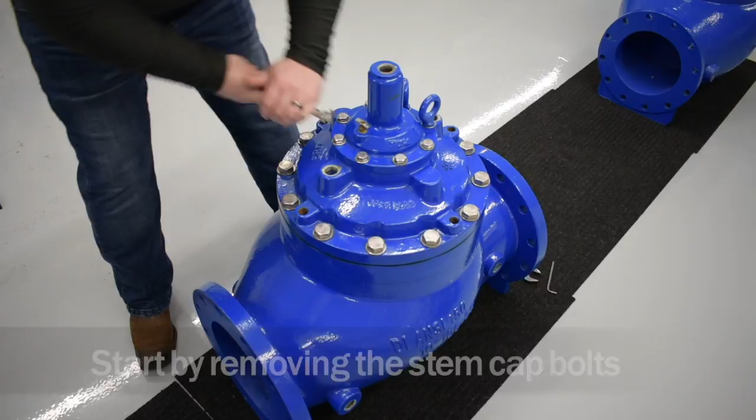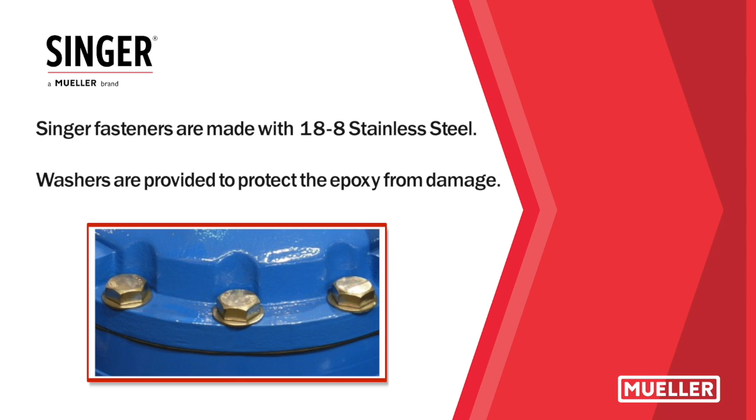Start by removing the stem cap bolts. Singer fasteners are made with 18/8 stainless steel. Washers are provided to protect the epoxy from damage. Press down on the stem cap before removing the final bolt. The spring could eject the stem cap without pressure.

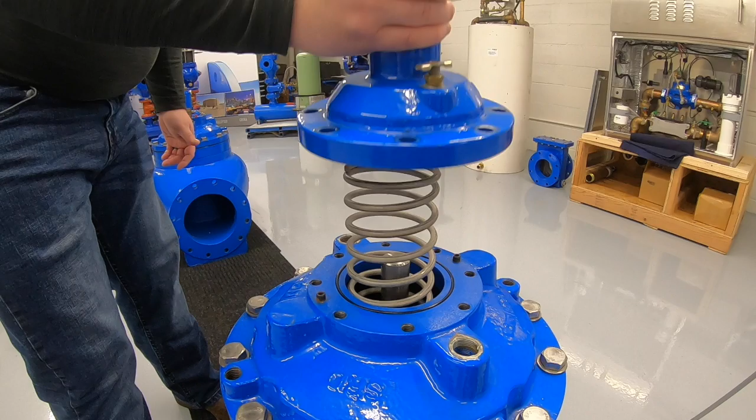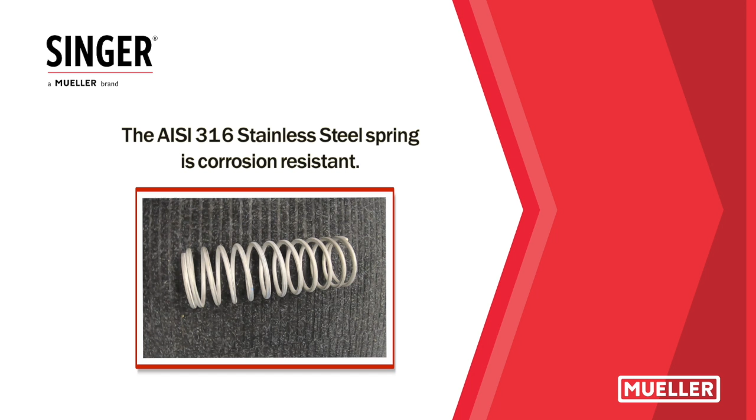A removable stem cap allows for access to the stem without the removal of the bonnet. This saves time and labor when adding stem accessories in the field. Remove the spring. The AISI 316 stainless steel spring is corrosion resistant. The stem cap features locating pins for easier placement.

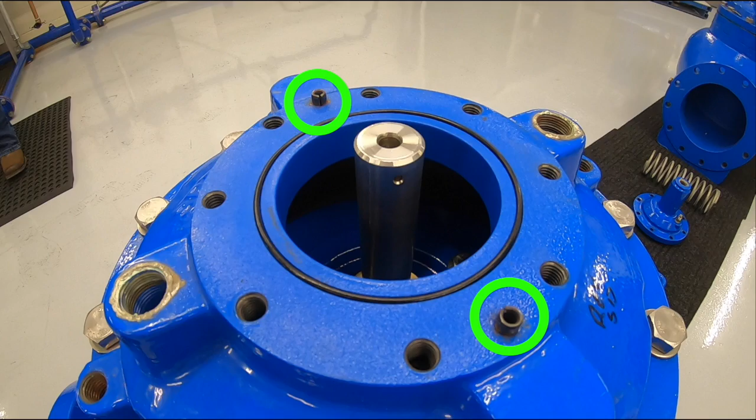Remove the bonnet. Once the bonnet bolts are removed, utilize the lifting eye bolts to lift the bonnet. Lifting eye bolts assist in disassembly on larger valves. A partner lift is recommended.

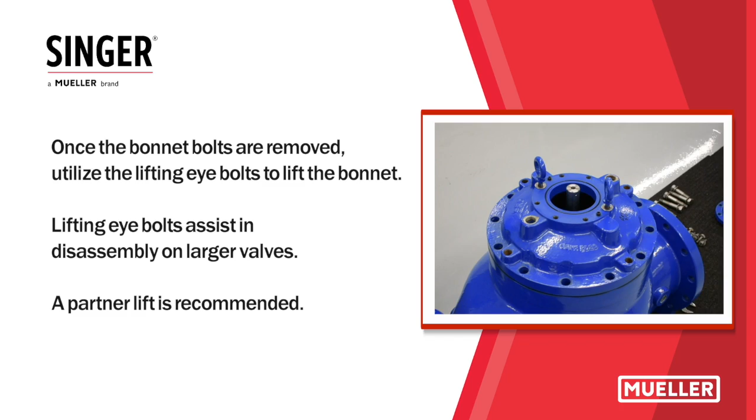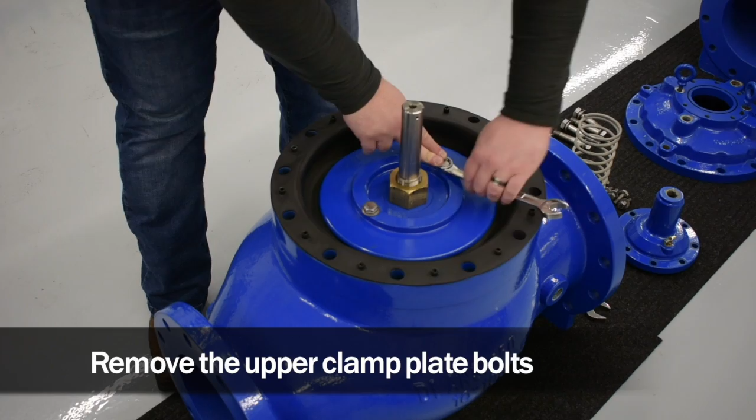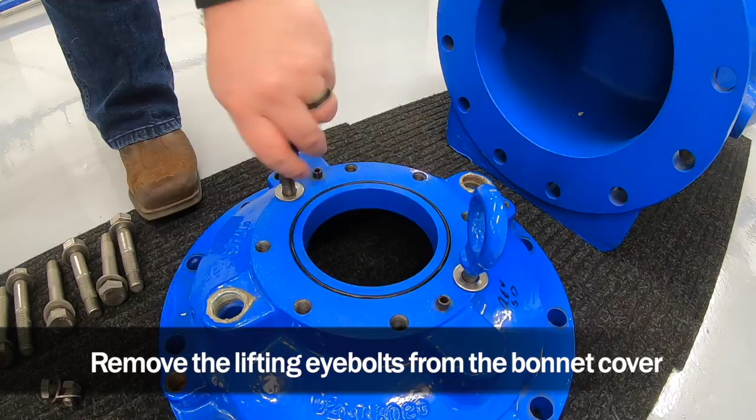Remove the upper clamp plate bolts. Remove the lifting eye bolts from the bonnet cover. Attach the lifting eye bolts to the upper clamp plate. Tighten by hand. Lift the diaphragm off of the locating pins.

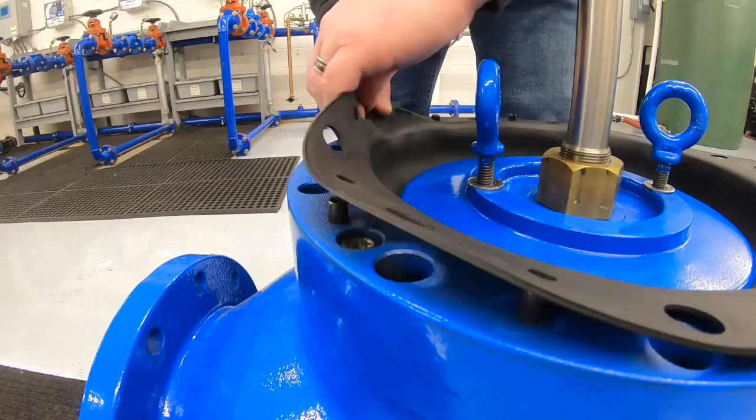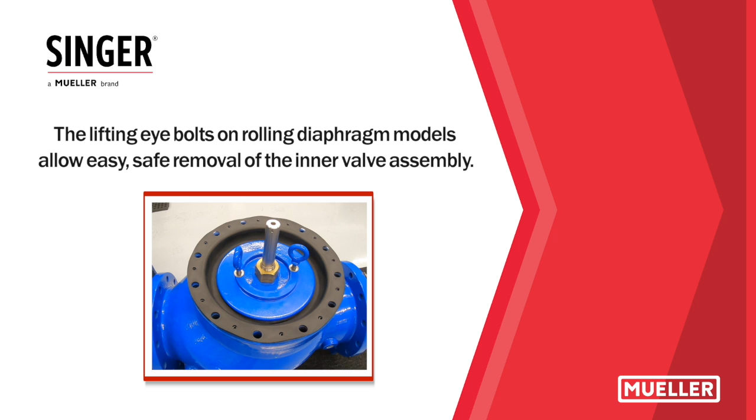The lifting eye bolts on rolling diaphragm models allow easy, safe removal of the inner valve assembly. Use a partner to lift the diaphragm assembly vertically as to not damage the stem.

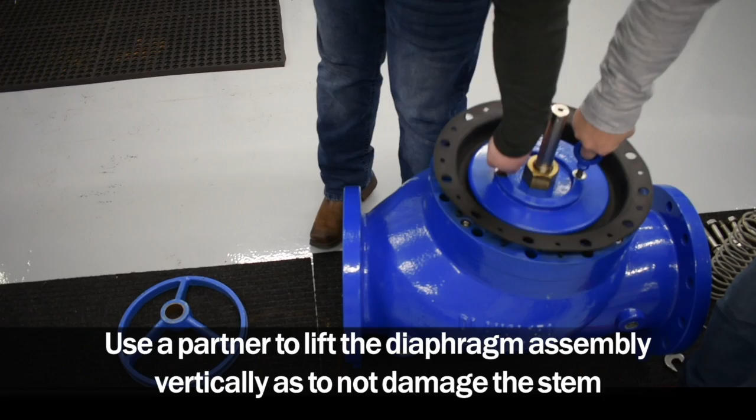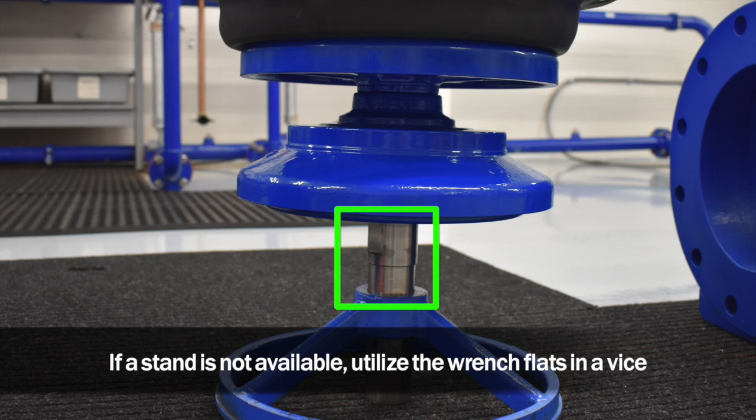If a stand is not available, utilize the wrench flats in a vise. Wrench flats are standard on 10-inch and below. This keeps the stem from being damaged while servicing. Available with oxynitride treatment to increase lubricity. 316 stainless steel construction.

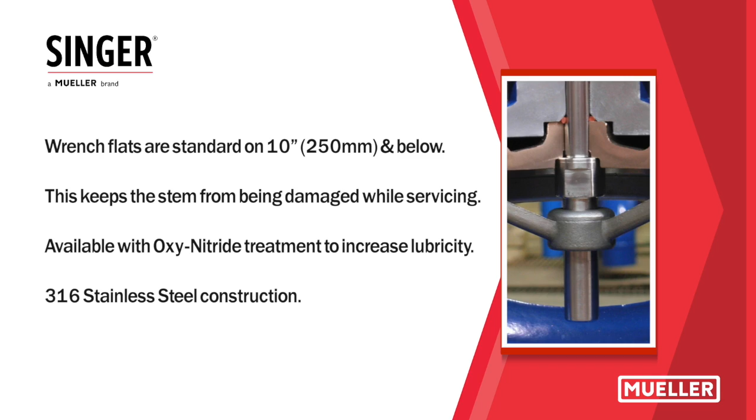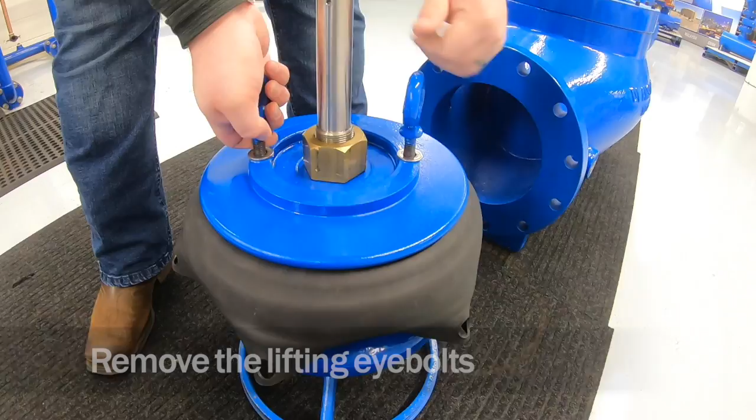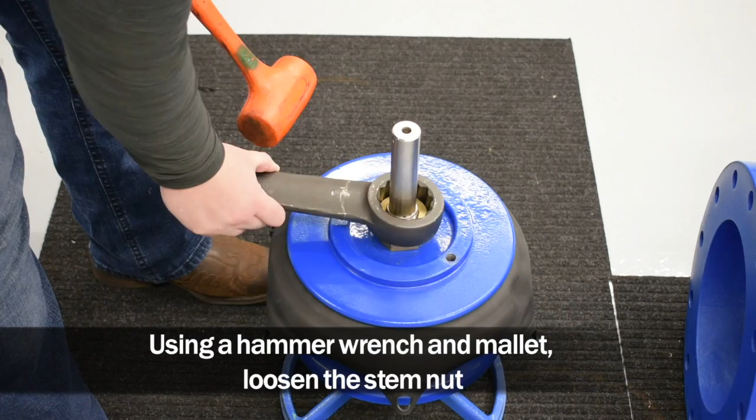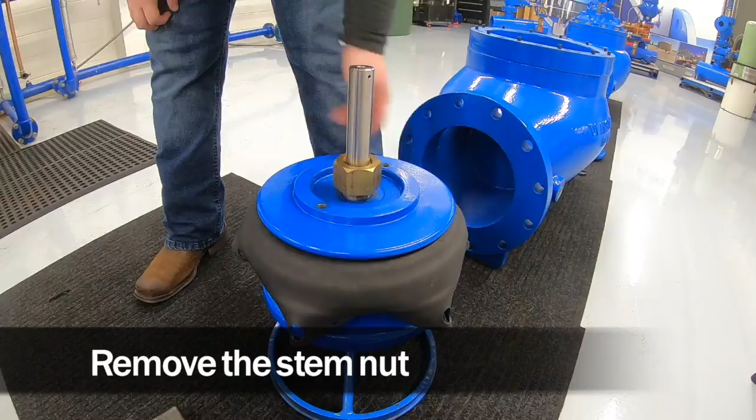Carefully fold back the diaphragm. Remove the lifting eye bolts. Using a hammer wrench and mallet, loosen the stem nut. Remove the stem nut. Lift the upper clamp plate off of the diaphragm assembly.

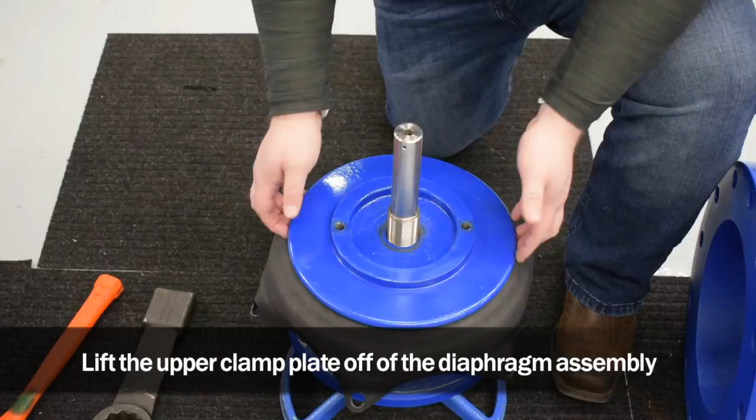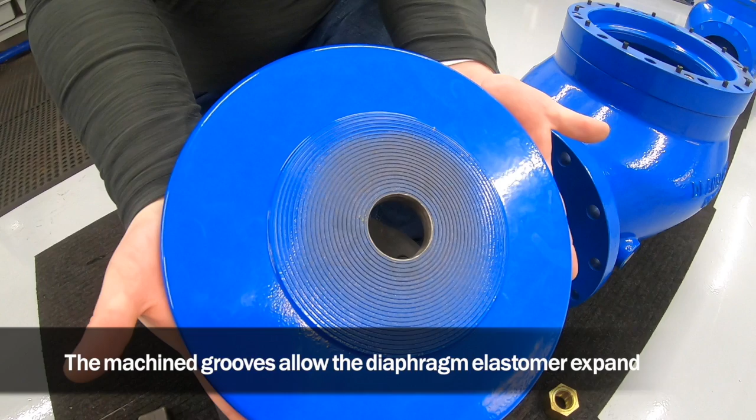The machined grooves allow the diaphragm elastomer to expand. Carefully return the diaphragm to the original position. Lift the diaphragm off of the stem. Singer rolling diaphragm design offers unequaled low-flow stability, increased efficiency for cost savings. EPDM elastomer construction is standard, chlorine and chloramine resistant.

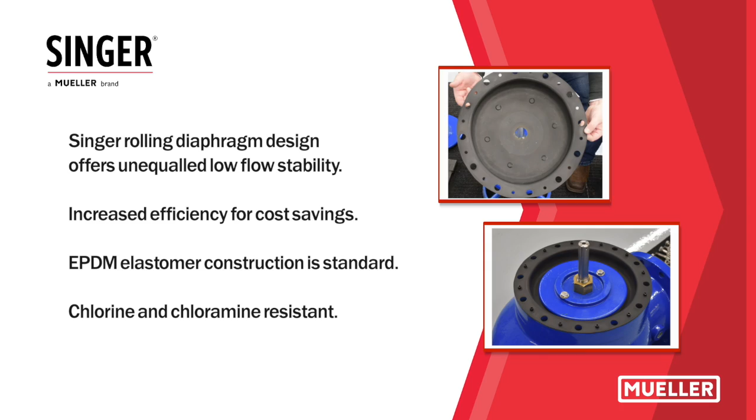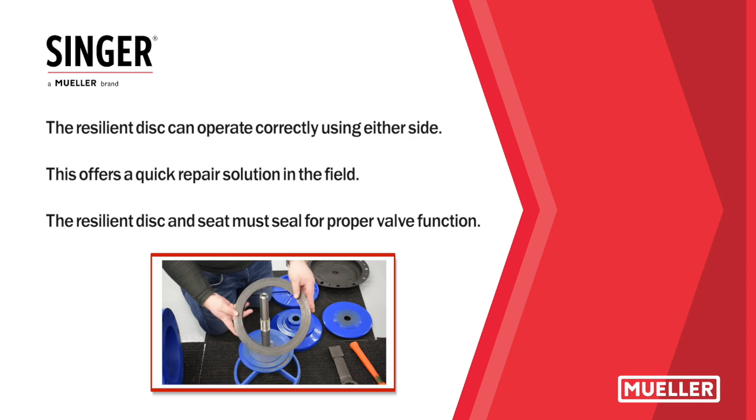Lift the lower clamp plate off of the stem. Lift the inner valve off of the stem. Lift the resilient disc off of the stem. The resilient disc can operate correctly using either side. This offers a quick repair solution in the field. The resilient disc and the seat must seal for proper valve function. Place the resilient disc onto the disc retainer with the sealing surface facing down.

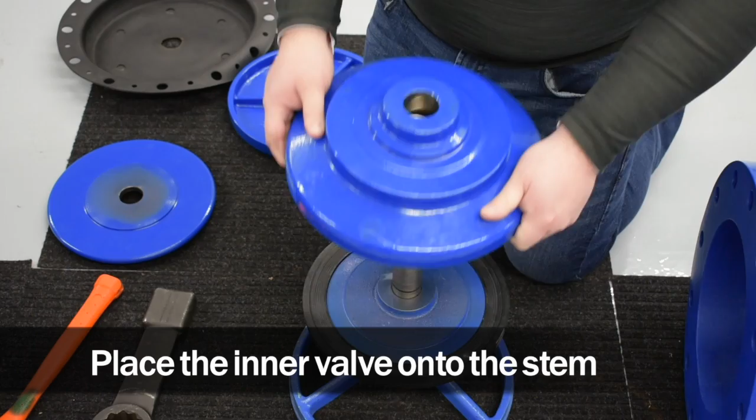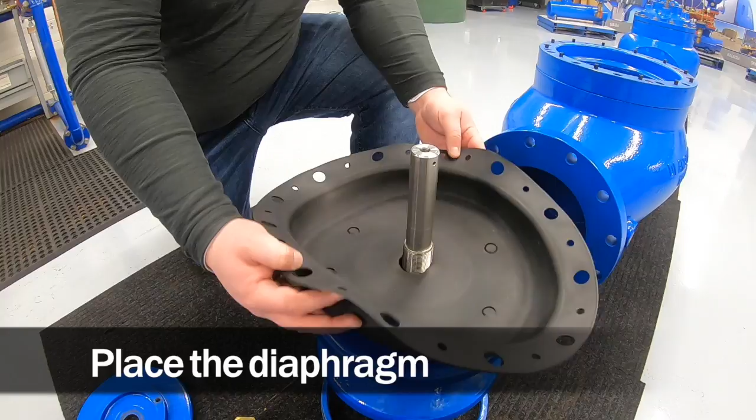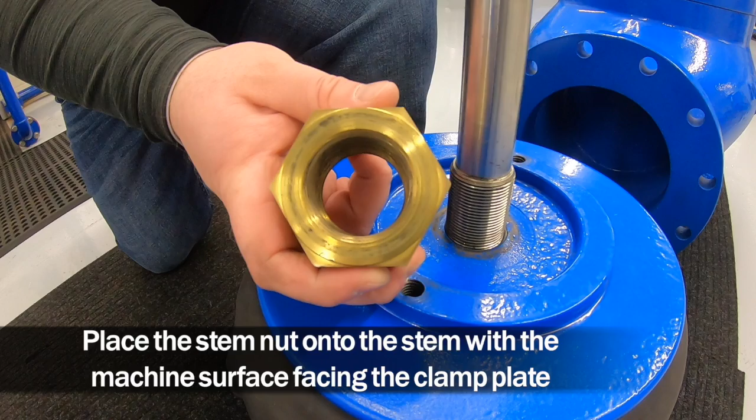Place the inner valve onto the stem. Place the lower clamp plate. Place the diaphragm. Carefully fold the diaphragm away from the stem. Place the upper clamp plate onto the diaphragm. Place the stem nut onto the stem with the machined surface facing the clamp plate. Hand tighten.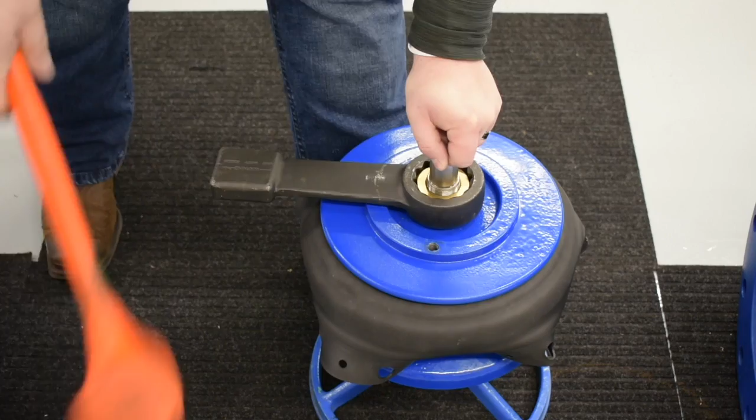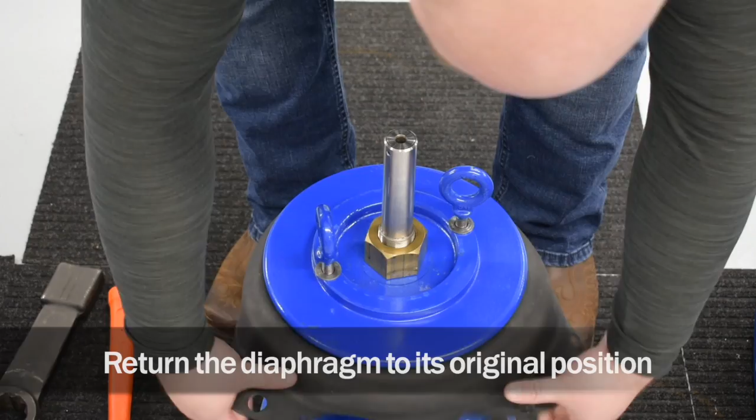Firmly tighten the stem nut with a hammer wrench and mallet. Attach the lifting eye bolts to the clamp plate. Return the diaphragm to its original position. Locating pins are utilized to easily install the diaphragm and bonnet. This keeps the diaphragm from binding or tearing during installation.

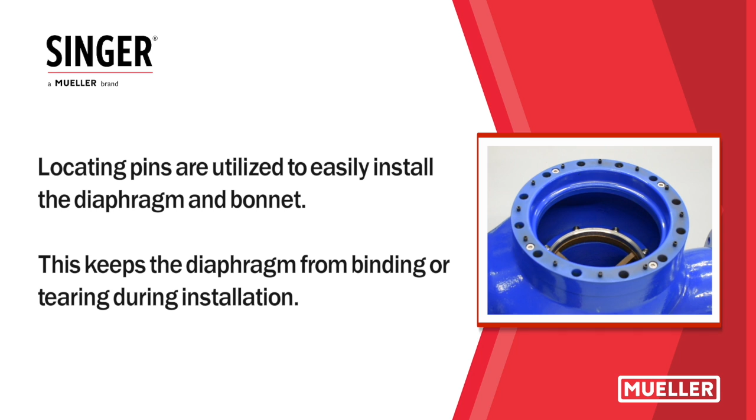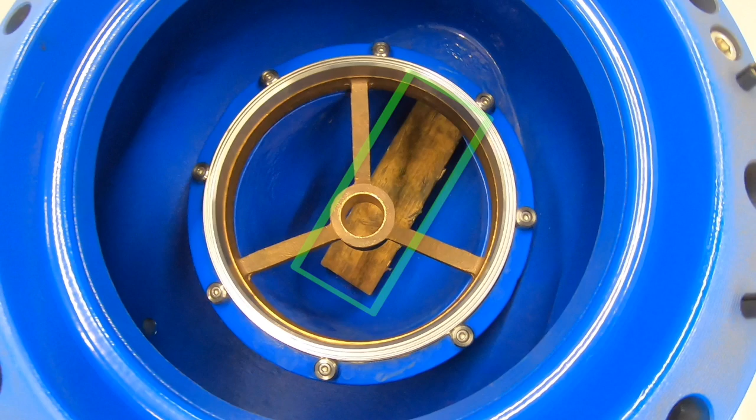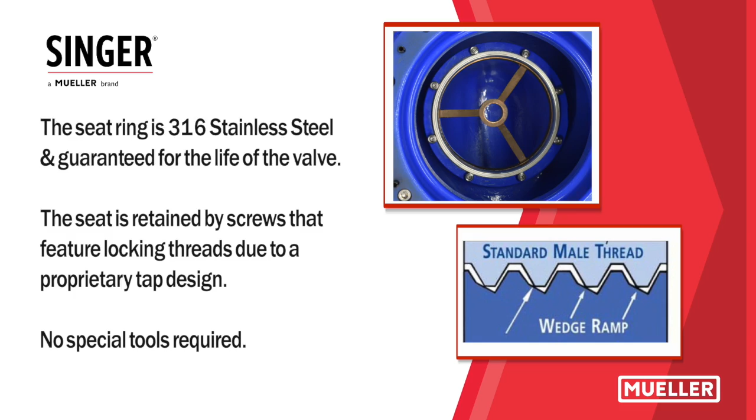Debris underneath the seat is easily removed. The seat ring is 316 stainless steel and guaranteed for the life of the valve. The seat is retained by screws that feature locking threads due to a proprietary tap design. No special tools required. Use an Allen key to loosen the seat screws.

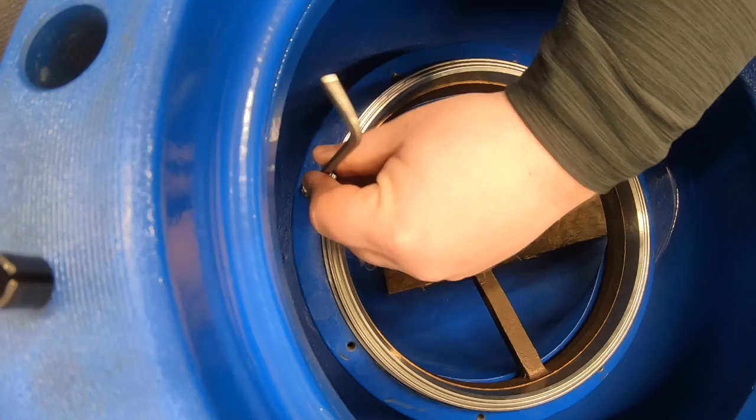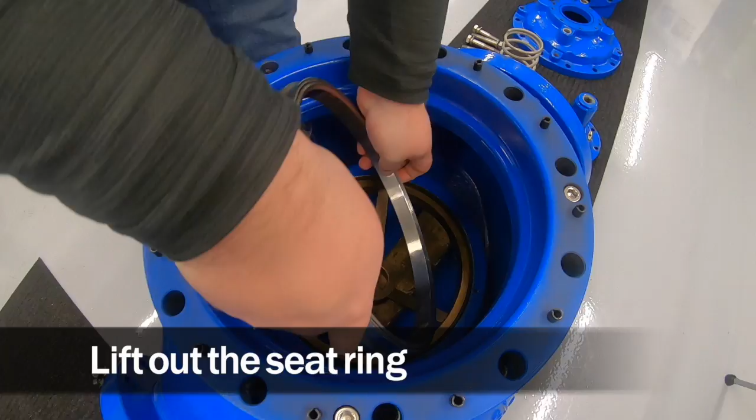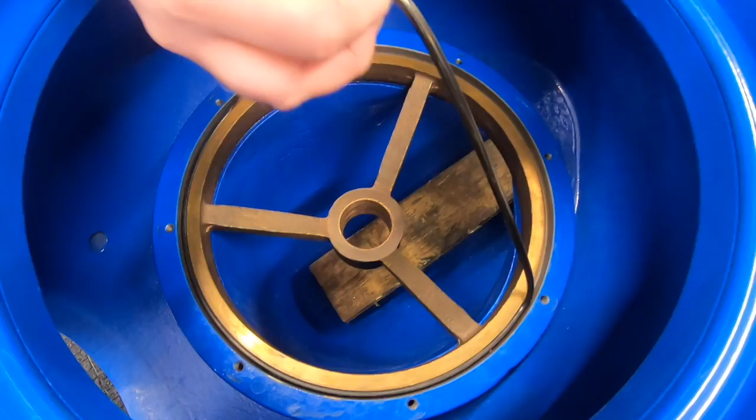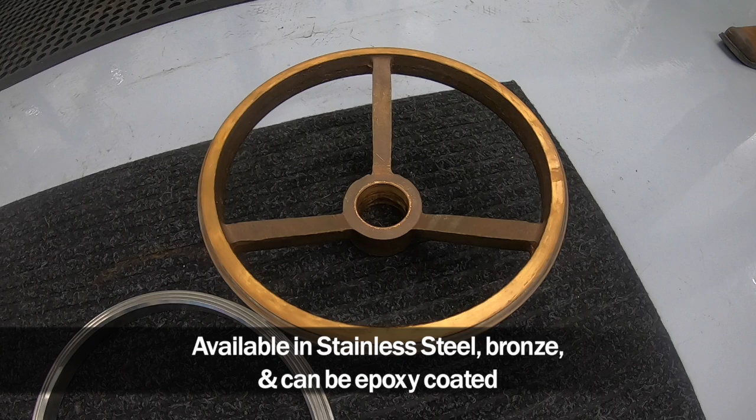The seat and stem guide are two separate pieces in this application. Lift out the seat ring. The seat ring features bevels that provide quiet valve operation. Carefully remove the seat seal. Remove the stem guide. The stem guide is available in stainless steel, bronze, and can be epoxy coated. Remove the debris.

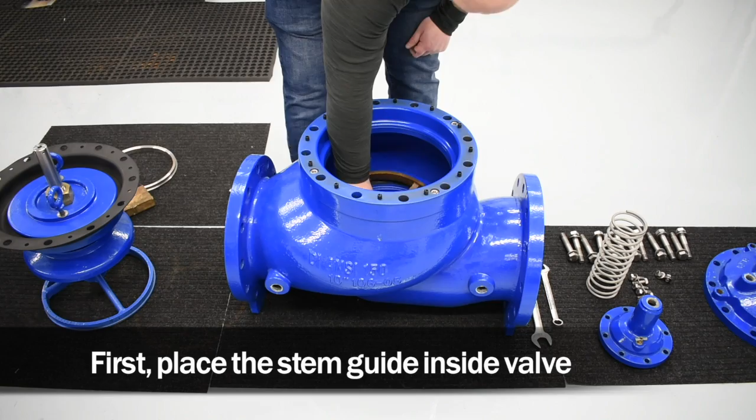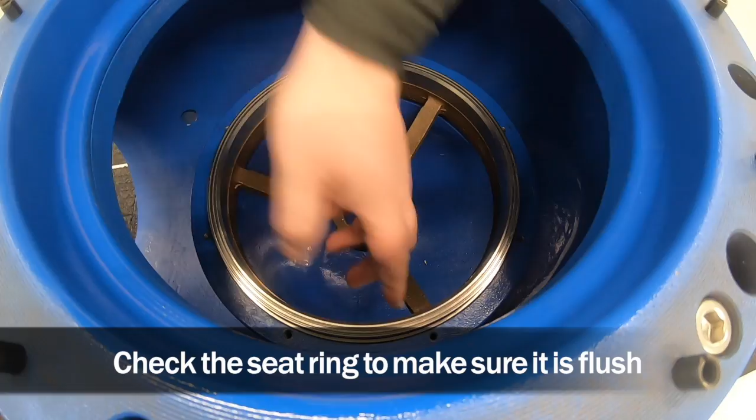Now that the debris is removed, reassemble the valve. First, place the stem guide inside the valve. Install the seat seal around the stem guide. Place the seat ring onto the stem guide. Check the seat ring to make sure it is flush. Start the screws by hand before tightening.

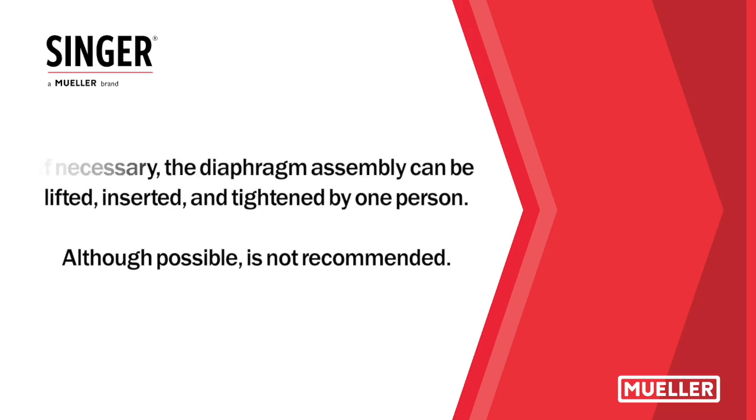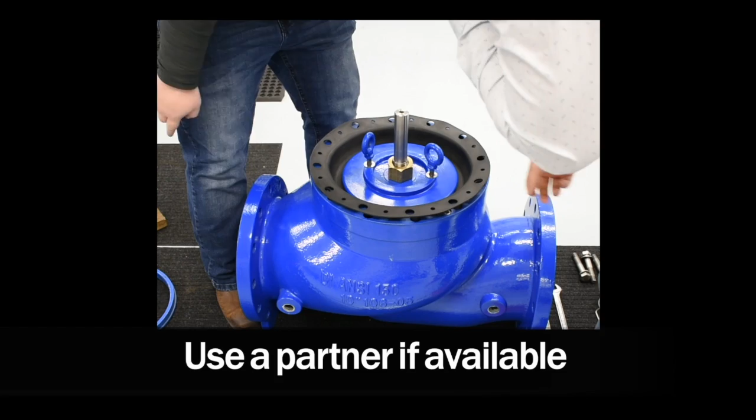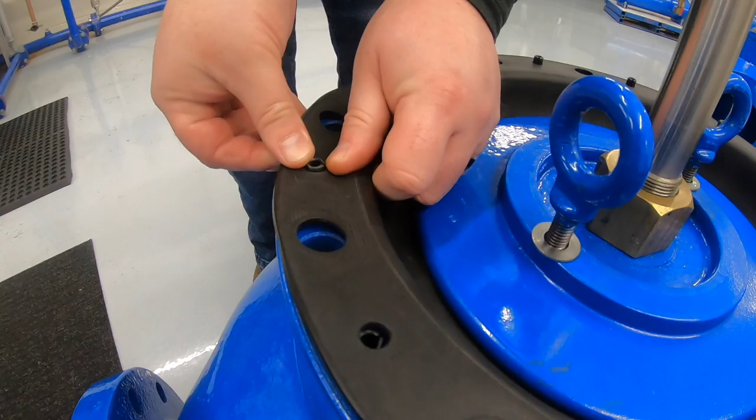If necessary, the diaphragm assembly can be lifted, inserted, and tightened by one person, although possible, it is not recommended. Use a partner if available. Utilize the locating pins for proper alignment. Remove the lifting eye bolts. Install the clamp plate bolts. Tighten the clamp plate bolts. Attach the lifting eye bolts to the bonnet.

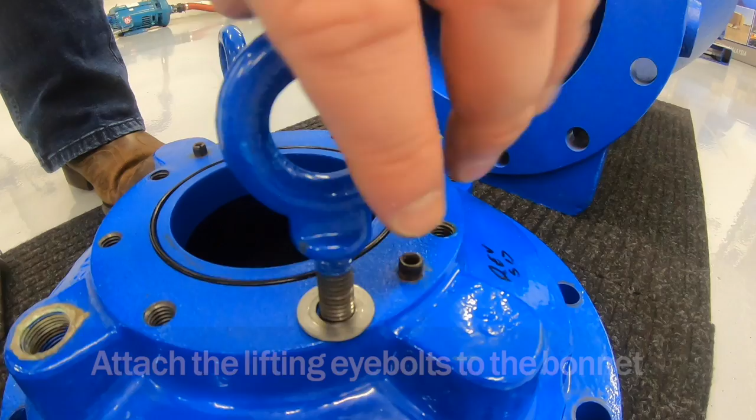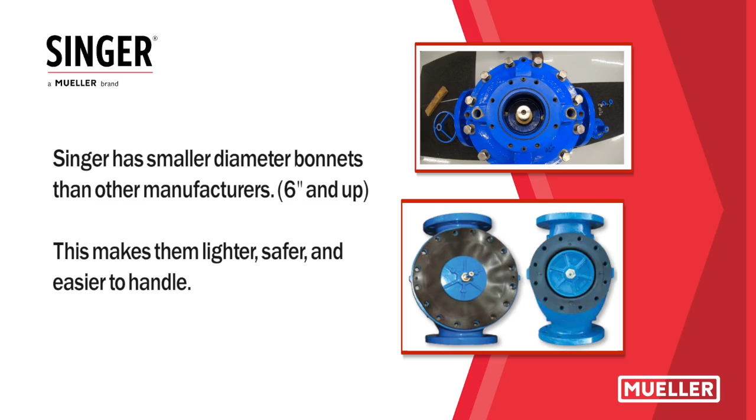Place the bonnet onto the valve. Singer has smaller diameter bonnets than other manufacturers. This makes them lighter, safer, and easier to handle. Remove the lifting eye bolts. Install the bonnet bolts. Hand tighten the bonnet bolts. Tighten the bonnet bolts in a star-crossed pattern.

Place the spring into the valve. Utilize the locating pins to properly install the stem cap. Press down and tighten the stem cap bolts. Tighten the stem cap bolts in a star-crossed pattern.

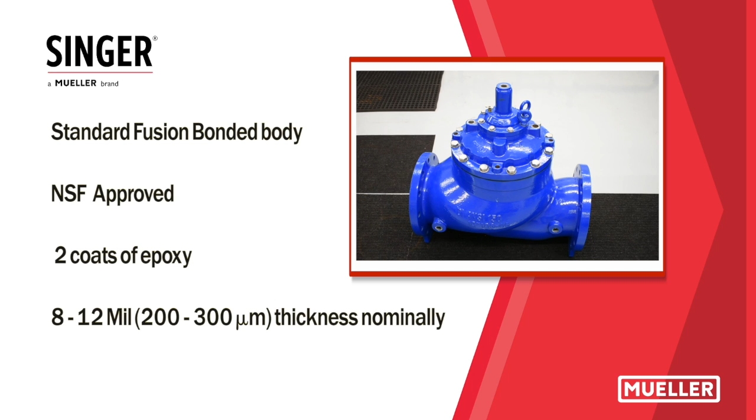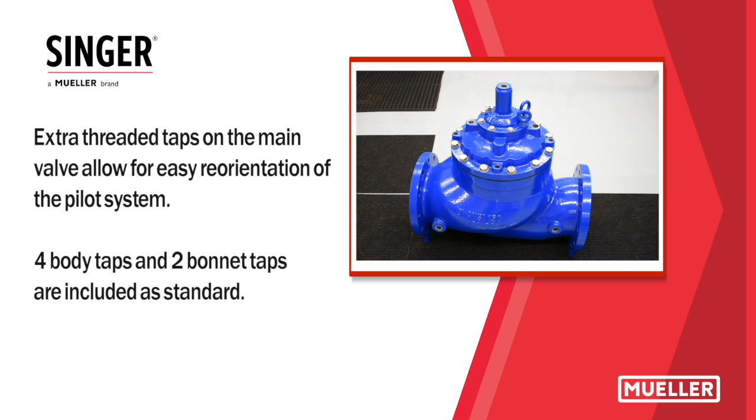The main valve body has a standard fusion bonded body, is NSF approved, 2 coats of epoxy at 8 to 12 mils thickness nominally. Extra threaded taps on the main valve allow for easy reorientation of the pilot system. 4 body taps and 2 bonnet taps are included as standard. This is the Singer Advantage.